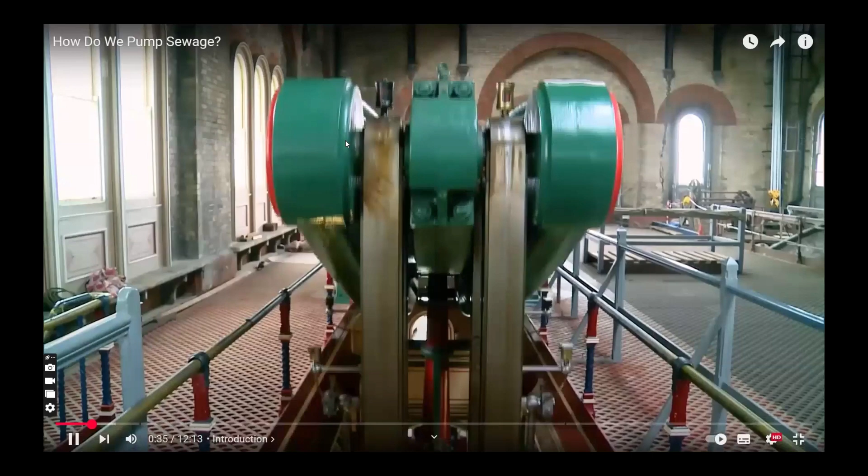Even though we have more sophisticated ways to treat wastewater before discharging it into streams and rivers, there's one thing that hasn't changed. We still use gravity as the primary way of getting waste to flow away from homes and businesses within the sewers below ground. And eventually we need a way to bring that sewage back up to the surface of the earth. But that's not as easy as it sounds.

I'm Grady, and this is Practical Engineering. In today's episode, we're talking about sewage lift stations.

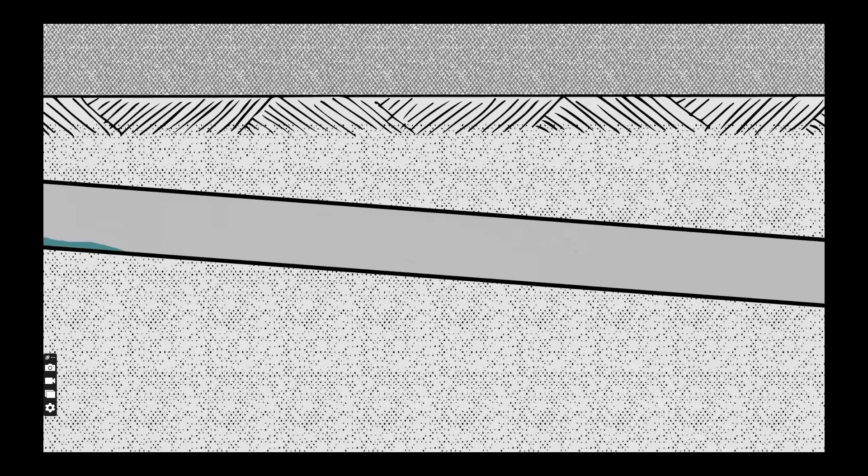I have a video all about the engineering of sewers, and today we're following that wastewater one more step on its smelly journey through a typical city. You can go check out that video after this if you want to learn more, but I'll summarize it quickly here. Most sewers flow by gravity from each home or business toward a wastewater treatment plant. They're installed as pipes, but sewers usually flow only partly full, like smelly water slides or underground creeks and rivers.

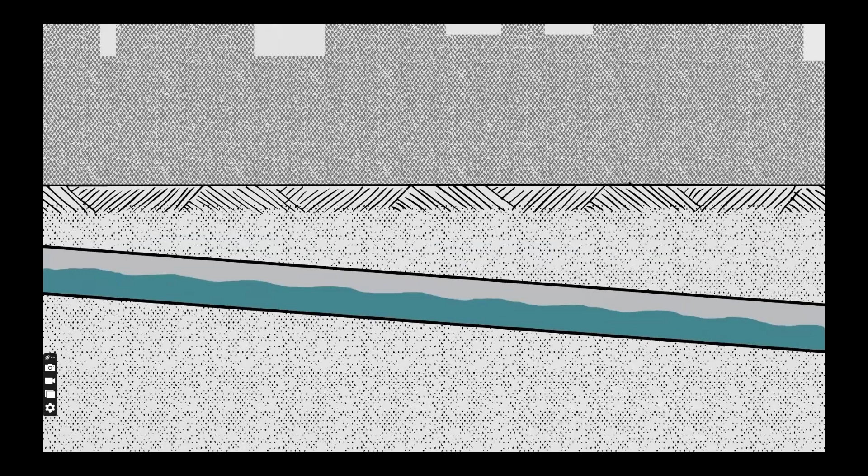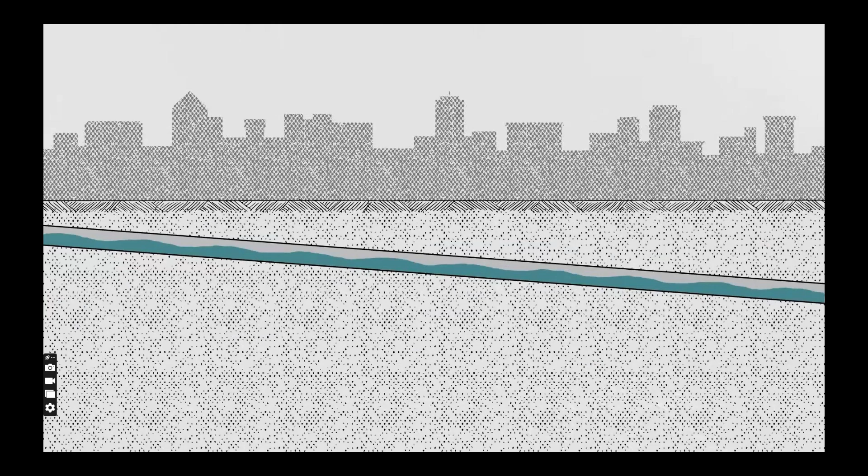This is convenient because we don't have to pay a monthly gravity bill, and it almost never gets knocked out during a thunderstorm. It's a free and consistent force that compels sewage downward, but because Earth's gravity only pulls in one direction, sewers must always slope, meaning they often end up well below the ground surface, especially toward their downstream ends. And that can be problematic.

Here's why. Sewers are almost always installed in open excavations, also known as trenches. This might seem obvious, but the deeper a trench must be dug, the more difficult, dangerous, disruptive, and ultimately expensive construction becomes. In some cases, it just stops being feasible to chase the slope of a sewer farther and farther below the ground surface. A good alternative is to install a pumping station that can lift raw sewage from its depths back closer to the surface.

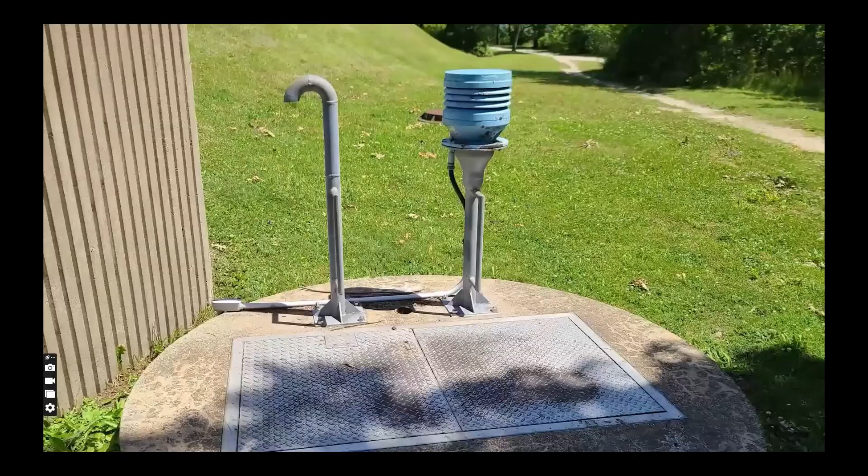Lift stations can be small installations designed to handle a few apartment complexes or massive capital projects that pump significant portions of a city's total wastewater flow.

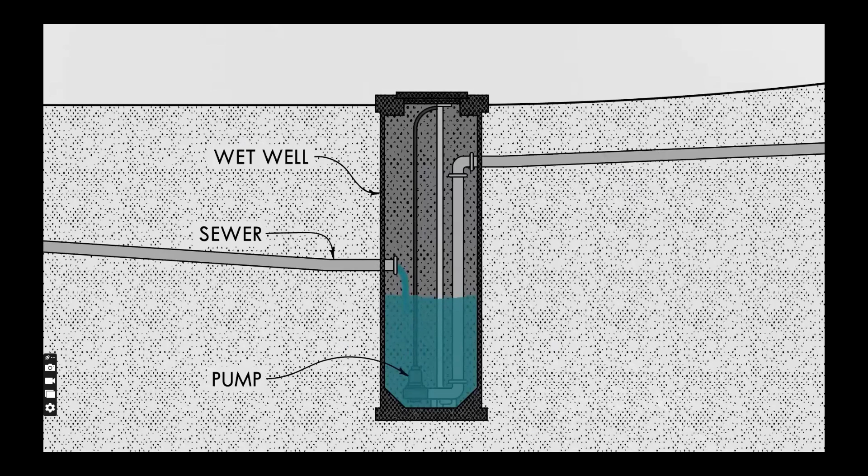A typical lift station consists of a concrete chamber called a wet well. Sewage flows into the wet well by gravity, filling it over time. Once the sewage reaches a prescribed depth, a pump turns on, pushing the wastewater into a specialized sewer pipe called a force main. You always want to keep the liquid moving swiftly in pipes to avoid the solids settling out, so this intermittent operation makes sure that there are no slow trickles during off-peak hours.

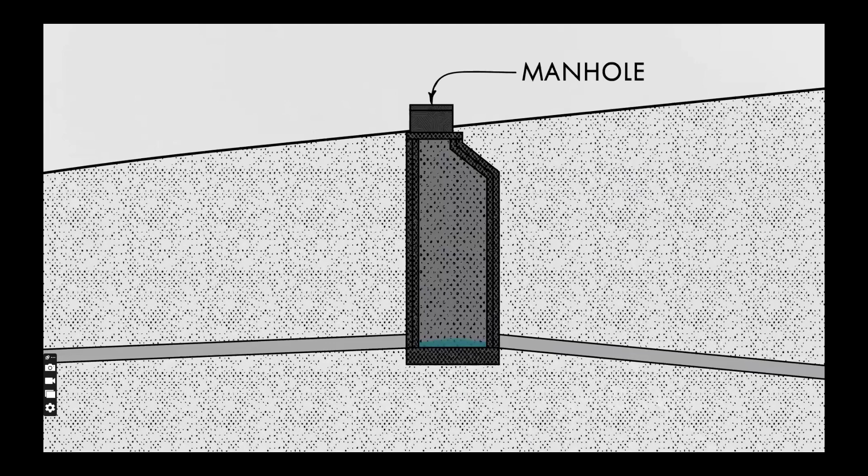The sewage travels under pressure within the force main to an uphill manhole where it can continue its journey downward via gravity once again. Another important location for lift stations is at the end of the line.

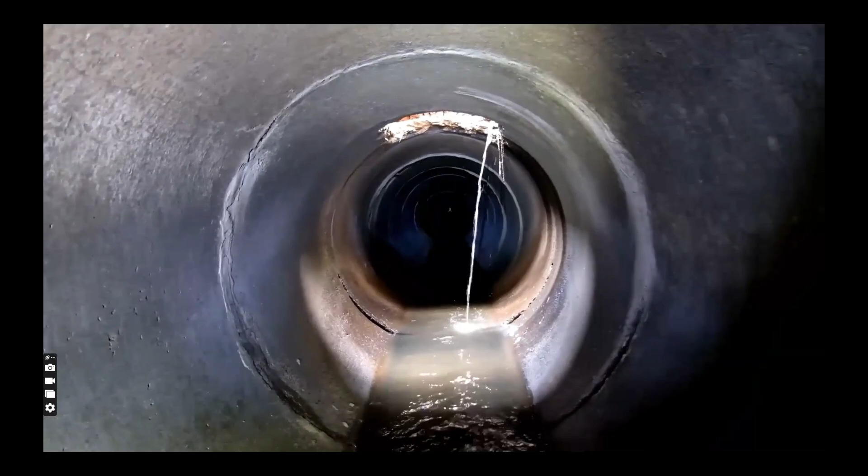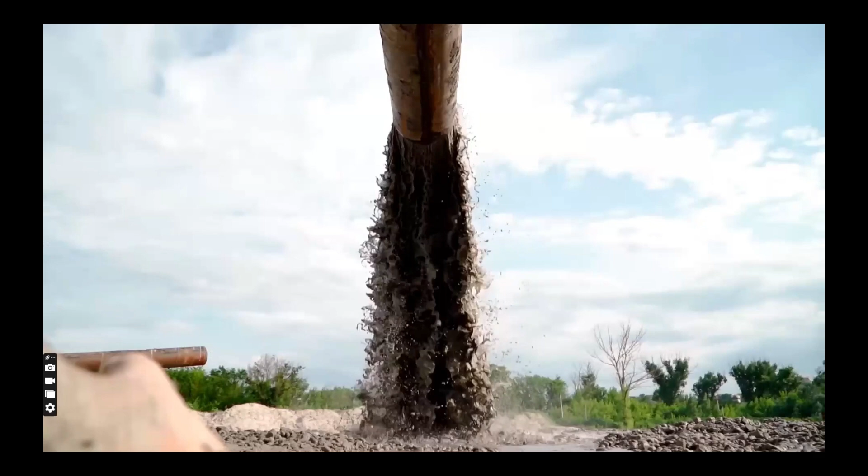Once wastewater reaches its final destination, there are no magical underground sewage outlets. Septic systems get rid of wastewater through leach fields that infiltrate the subsurface, but they're designed for individual buildings and aren't feasible on a city scale. That would require enormous areas of land to get so much liquid to soak into the soil, not to mention the potential for contamination of the groundwater.

Ignoring for now the fact that we need to clean it up first, we still need somewhere for our sewage to go. In most cases, that's a creek, river, or the ocean, meaning we need to lift the sewage up to the surface of the earth one last time.

Rather than build wastewater treatment plants in underground lairs like stinky superheroes, so we only pump clean water, it's much easier just to lift the raw sewage up to the surface to be treated and eventually discharged. That means we have to send some pretty gross stuff, sewage, through some pretty expensive and sophisticated pieces of machinery, the pumps, and that comes with some challenges.

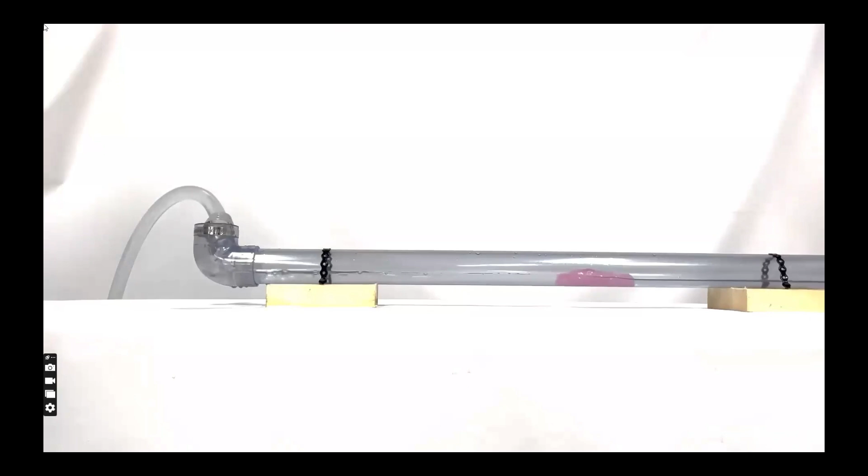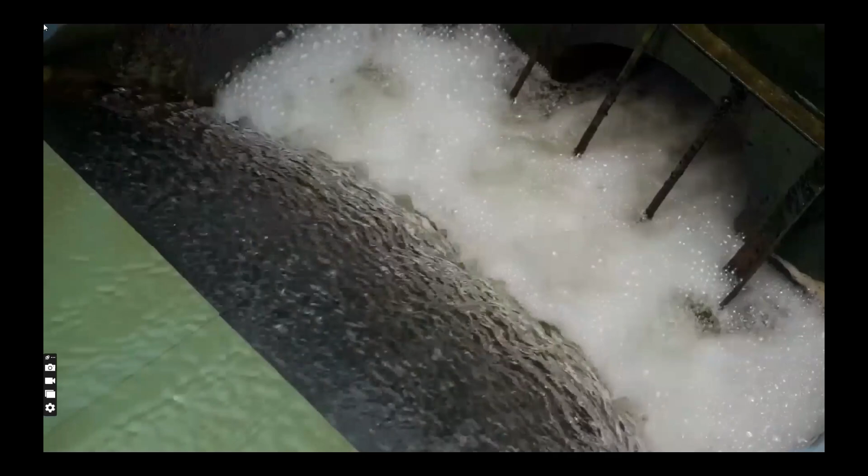We often think of sewage as its grossest constituents, human excrement. You know, poop. But sewage is a slurry of liquids and solids from a wide variety of sources. Lots of stuff ends up in our wastewater stream, including soil, soap, hair, food, wipes, grease, and trash.

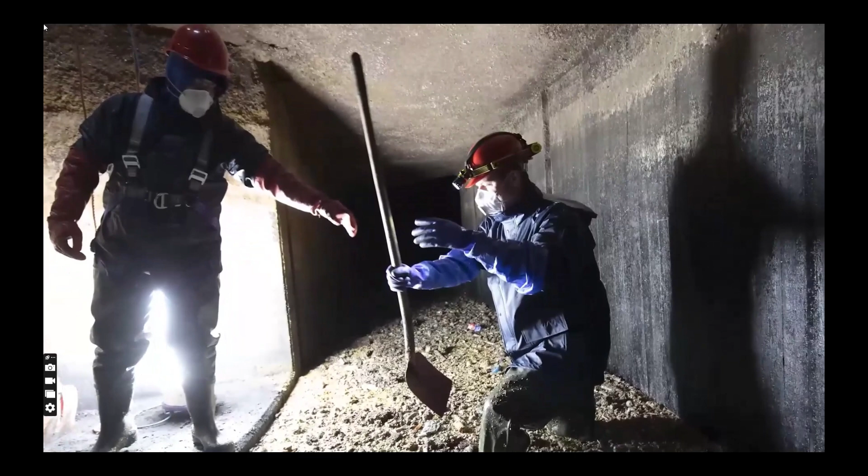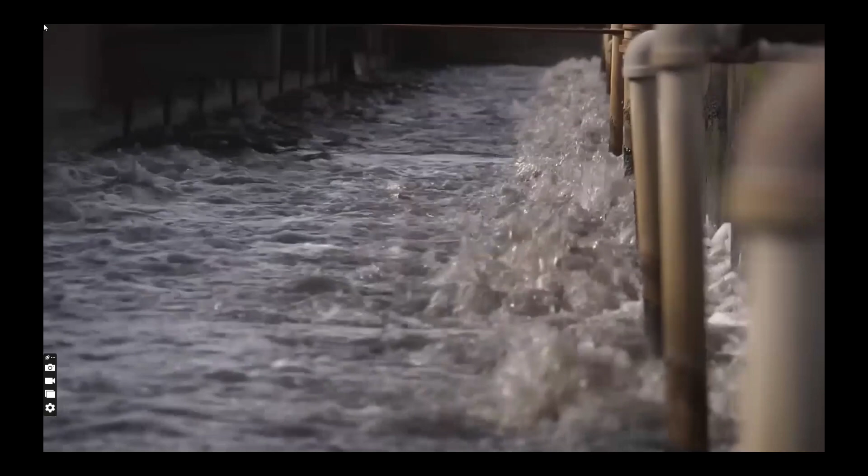These things may make it down the toilet or sink drain and through the plumbing in your house, but in the sewer system they can conglomerate into large balls of grease, rags, and other debris, sometimes called pigtails or fatbergs by wastewater professionals. In addition, with many cities putting efforts into conserving water, the concentration of solids in wastewater is trending upward. Conventional pumps handle liquids just fine, but adding solids in the stream increases the challenge of lifting raw sewage. Let me show you what I mean with this demonstration I set up in my garage.

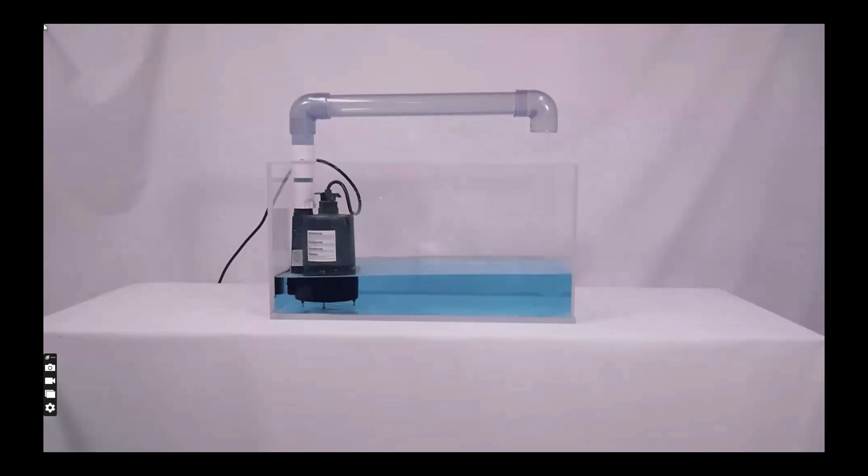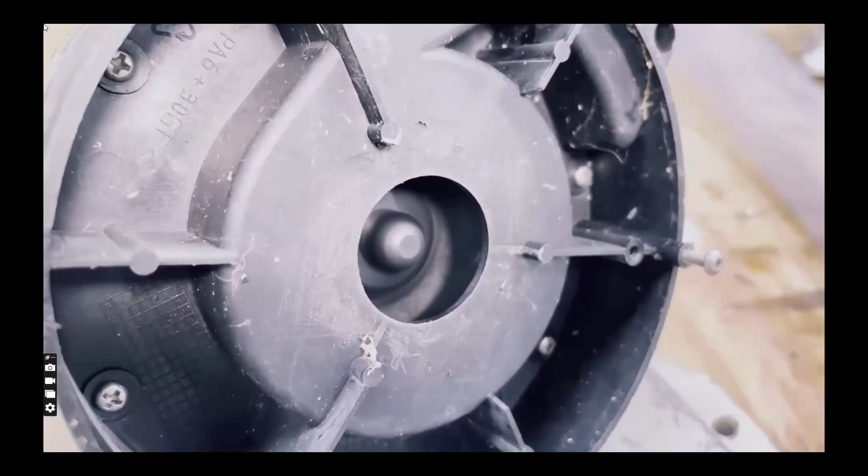This is a small submersible pump designed for moving water out of basements or pools. It's nothing fancy, just an electric motor with a small impeller inside a molded plastic case. I took off the screen so we can really see how much it can handle.

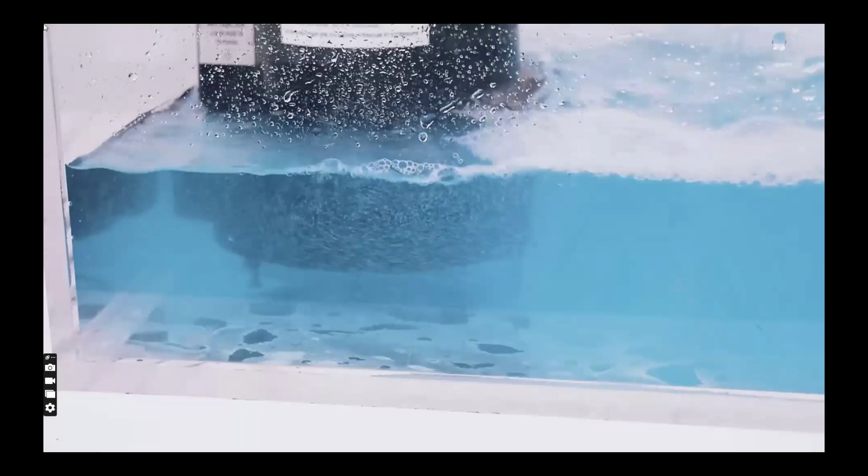The submersible pump moves clear water just fine. Toilet paper is no issue even for the small pump; it can break apart the paper with no problem. It can even manage small suspended solids like these plastic balls.

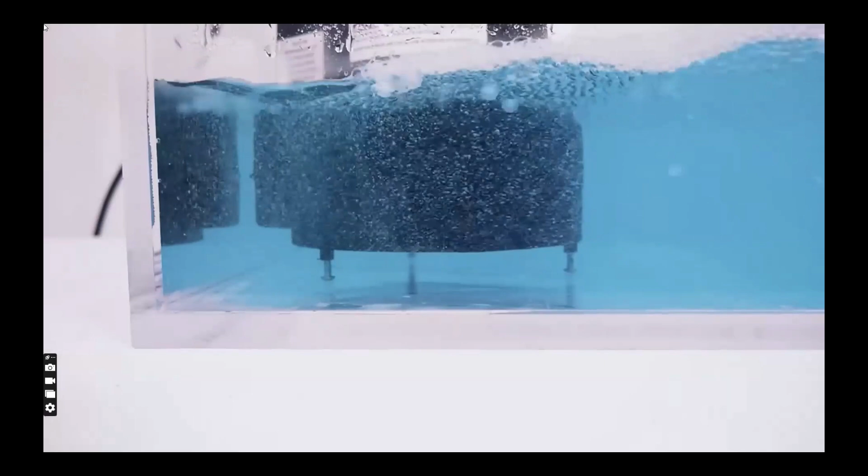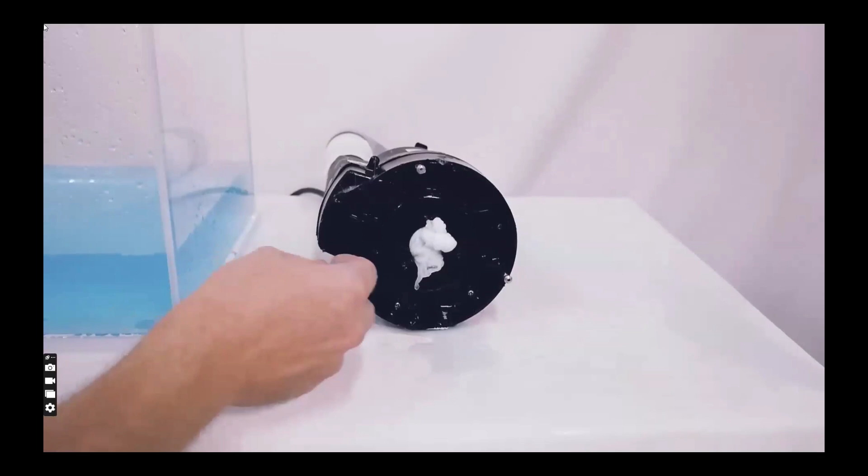The particles stay in solution, forming a slurry similar to raw sewage. However, larger solids in the stream can easily clog the pump. Anything bigger than the spaces in the impeller just won't make it through, and clogging really becomes a problem with stringy debris, like these quote-unquote flushable wipes. They may make it past a toilet, but you can easily see why these wipes are a problem in a wastewater stream. I don't feel like pouring a bunch of grease in my demonstration here, but you can imagine how congealed fats and oils would only exacerbate the clogging problem.

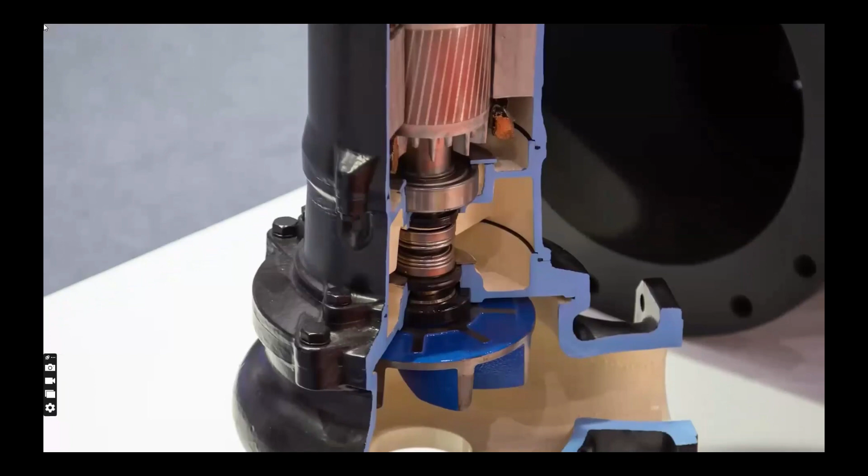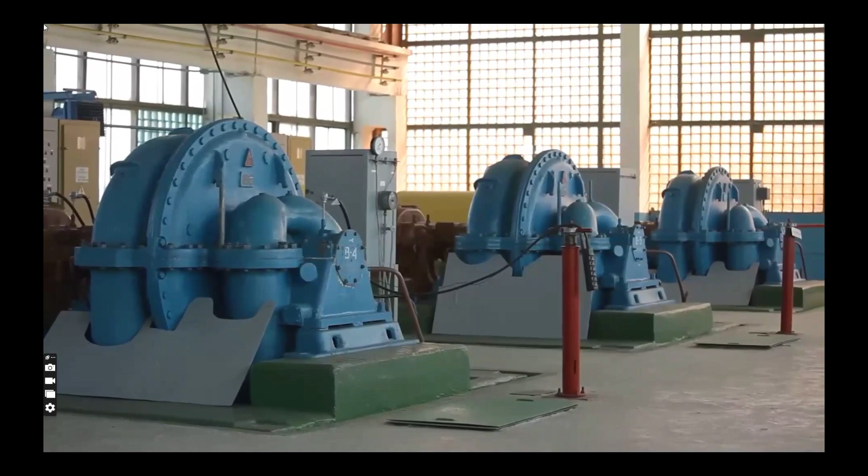It's clear that appropriately sized centrifugal pumps can handle certain types and sizes of suspended solids just fine. Sewage pumps are designed for the extra wear and tear: the impellers have fewer vanes to avoid snags, and the openings are larger so solids can freely move through them. Different manufacturers have proprietary designs to minimize obstructions as much as possible, but no sewage pump is clog-proof.

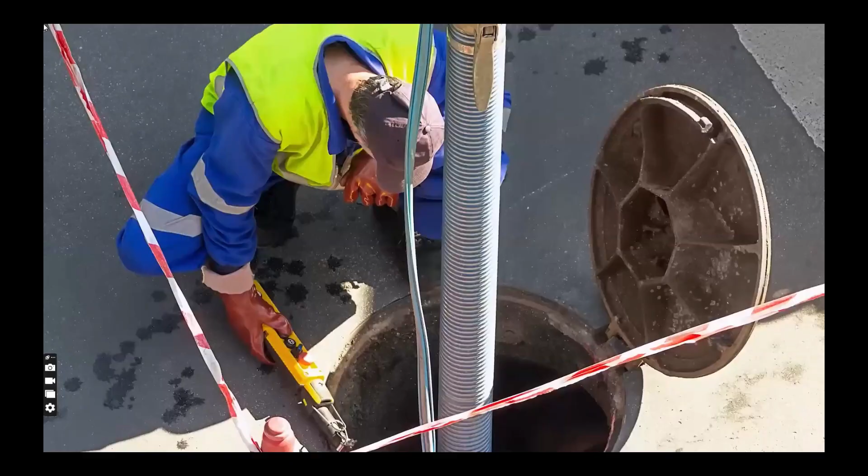Especially with today's concentrated wastewater full of wipes marketed as flushable, clogs in lift stations can be a daily occurrence. Removing a pump, clearing it of debris, and replacing it is a dirty and expensive job, especially if you have to do it frequently.

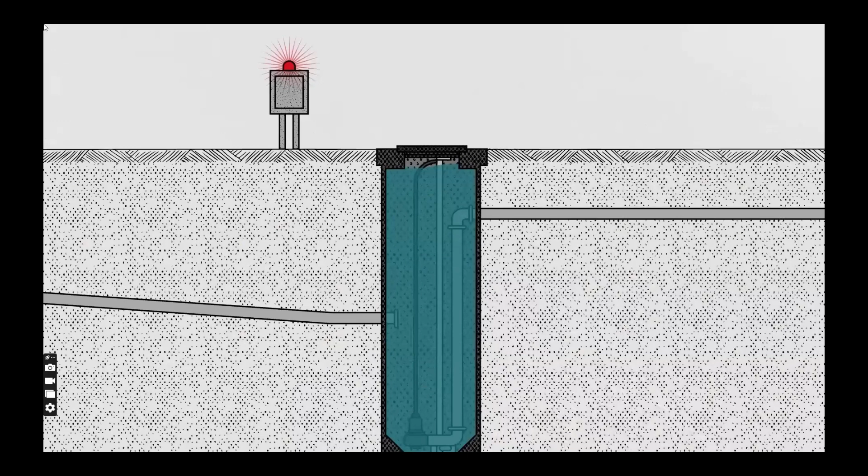Most lift stations have an alarm when the level gets too high, but if a clog doesn't get cleared fast enough, raw sewage can back up into houses and businesses or overflow the wet well, potentially exposing humans and wildlife to dangerous biohazards. A seemingly obvious solution to clogging is to use a screen in the lift station wet well to prevent trash from reaching the pumps.

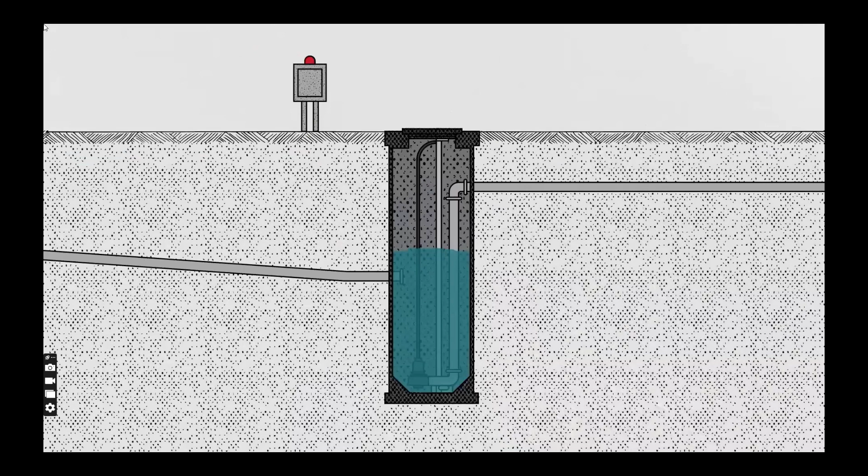But screens have a limitation: they can clog up too. By adding a screen, you've traded pump maintenance for another kind of maintenance: removing and hauling away debris.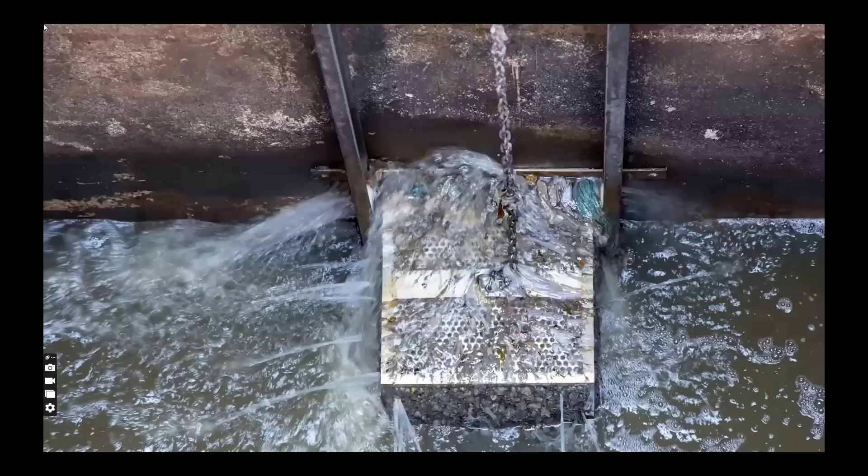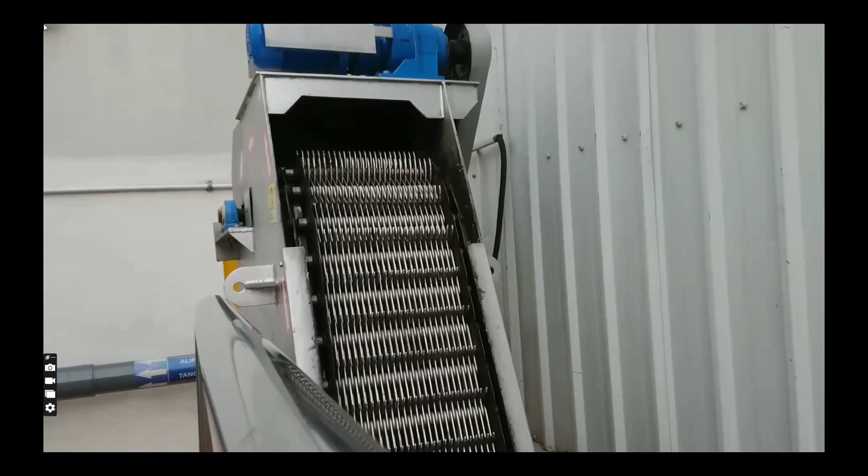Smaller lift stations with bar or basket screens can get away with maybe a once-a-week visit from a crew to clean them. Larger pump stations often feature automatic systems that can remove solids from the screen into a dumpster that can be hauled to a landfill every so often.

Sometimes using a screen is an effective way to protect against clogging, but it's not always convenient, especially since it creates a separate waste stream to manage. For example, if a lift station is remote where it's inconvenient to send crews for service and maintenance, you might prefer that all the solids remain in the wastewater stream.

After all, treatment plants are specifically designed to clean wastewater. They have better equipment and consistent staffing, so it often makes sense to focus the investment of time and effort at the plant rather than individual lift stations along the way. In these cases, there's another option for minimizing pump clogs: grinding the solids into smaller pieces.

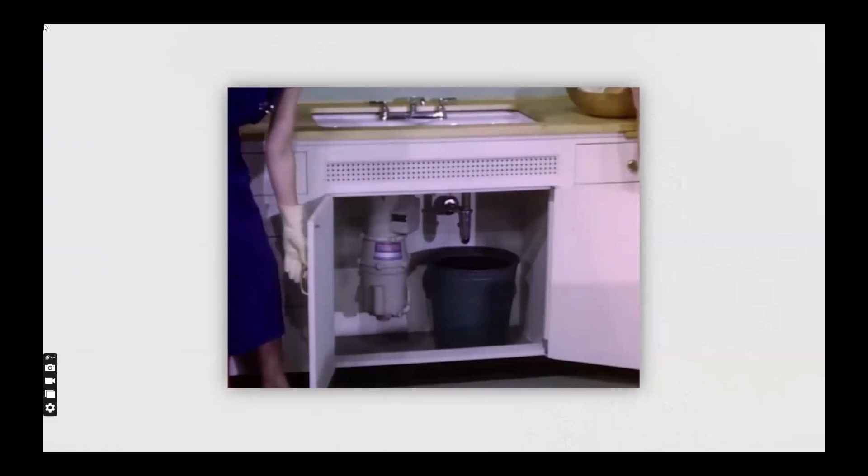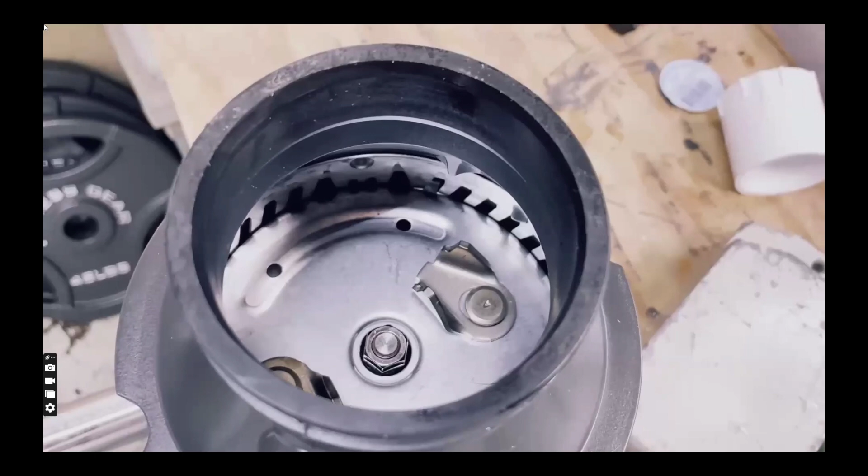There's a nice equivalent to a lift station grinder found under the sinks of many North American homes: the garbage disposal. This common household appliance saves you the trouble and smell of putting food scraps into the wastebasket. It works like a centrifugal pump with a spinning impeller, but it also features a grinding ring consisting of sharp blades and small openings.

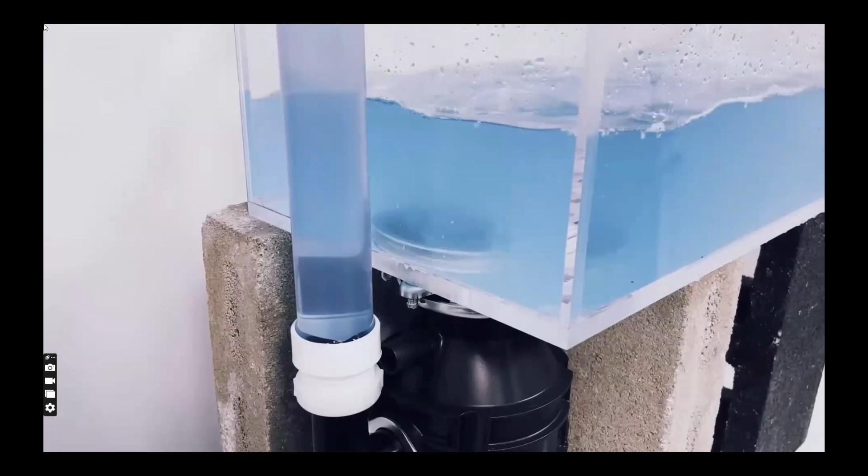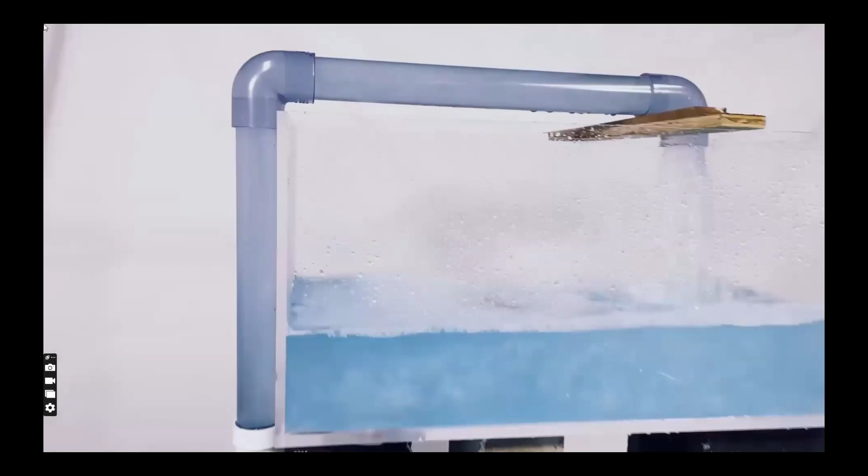As the impeller spins the solids, they scrape against the grinding ring, shearing into smaller pieces that can travel through the waste plumbing. My garbage disposal can handle all of the solids I tested with the submersible pump with no clogging issues. The wipes gave it a little trouble, but it was still able to chew them up.

Some lift stations feature grinding pumps remarkably similar to under-sink garbage disposals. Others use standalone grinders that simply chew up the solids before they reach the pumps. Grinders are often required at medical facilities and prisons, where fibrous solids are more likely to find their way into the wastewater stream. Large grinders are also used where storm drains and sewers are combined, since those systems see heavier debris loads from rainwater runoff.

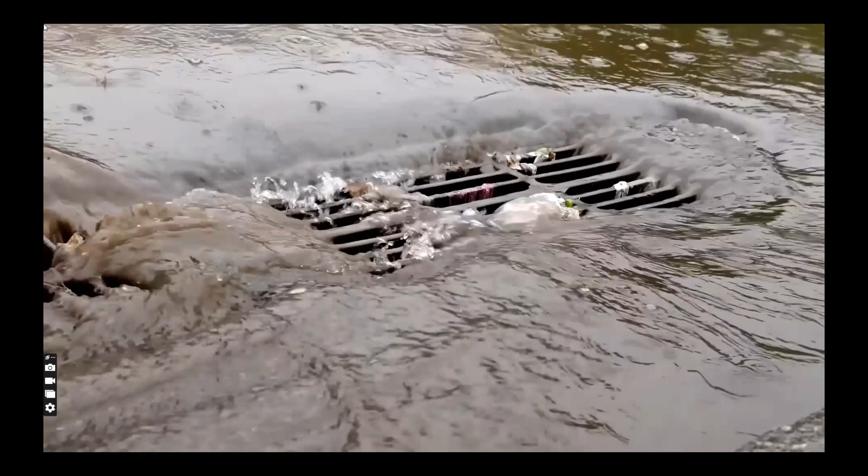A grinder is another expensive piece of equipment to purchase and maintain at a lift station, but it can offer better reliability, fewer clogs, and thus decreased maintenance costs.

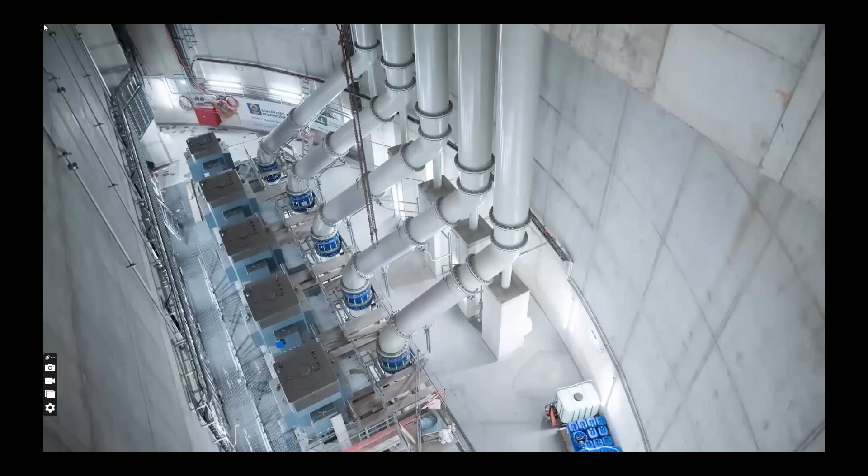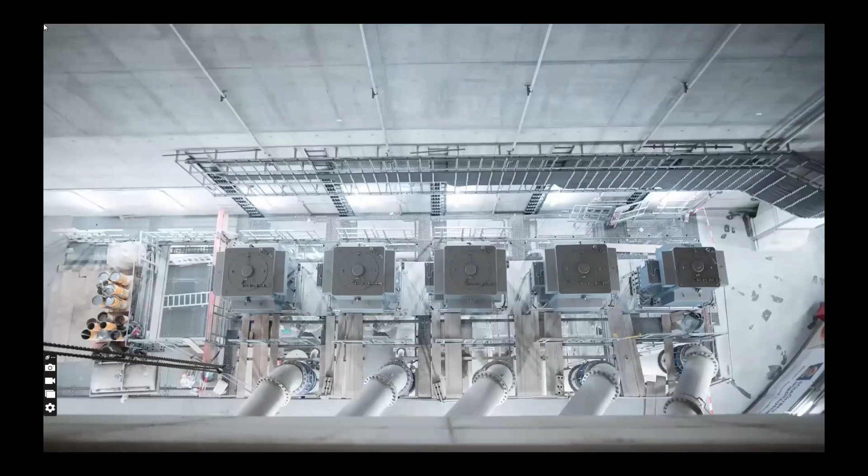Of course, clogging is not the only practical challenge of operating a sewage lift station. When you depend on electromechanical equipment to provide an essential service, you always have to plan for things to go wrong. Lift stations usually feature multiple pumps so they can continue operating if one fails. They often have backup generators so that sewage can continue to flow even if grid power is lost.

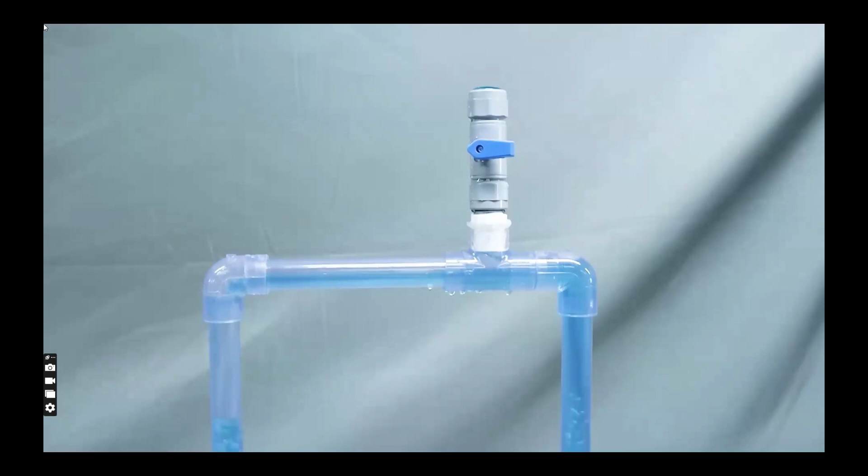Another issue with lift stations is air bubbles getting into force mains and constricting the flow. Automatic air release valves can purge force mains of these bubbles, but venting sewer gas into populated areas isn't usually a popular prospect. Although our urban lives depend on sewers to carry waste away before it can endanger public health, reminders that they exist are usually unwelcome.

Hopefully this video breaks that convention to help you understand a little about the challenges and solutions of managing wastewater to keep your city clean and safe.

It's time for everyone's favorite segment of me trying to cook while my wife tries to capture that on video. We're not expert chefs or foodies.

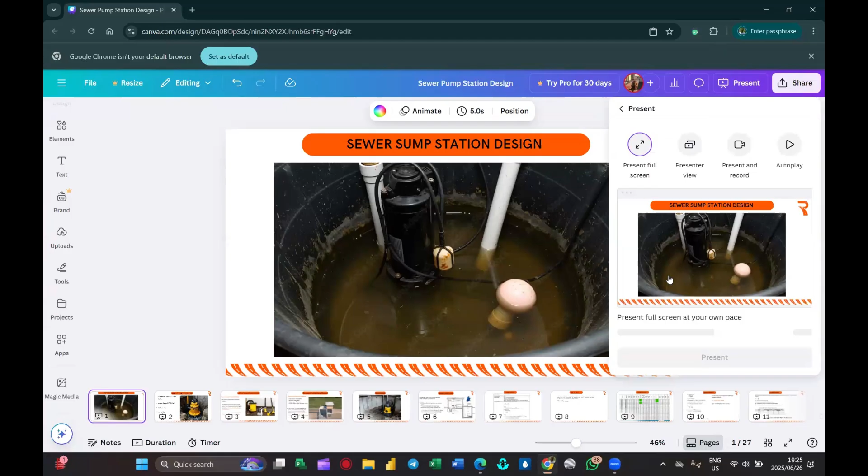Lance, Wesley, thank you. Jackson, it's good to see you. Thank you so much for joining us. I remember you, Trevor, thank you so much. Wesley dropped it too, but that's fine. Thank you so much, I get the message. So yeah, if you guys can see my screen, then that's good.

So today we're talking about sewer pump station design. As you can see, these are the topics to be covered. First of all, we're just going to talk about the purpose of the sewer pump station. Why do we need the pump station, and in what circumstances is it applicable? You need to understand under what circumstances you use a sewer pump station. You just don't use it because you want to use it, right?

The moment we introduce the word pump, just know that there's a lot of electricity involved, I'm sure you guys understand that. And the moment you introduce a pump, know that there's a lot of O&M that goes into that operation. O&M means operation and maintenance. So it's also something that you would be forced to think about. So yeah, the purpose of a sewer pump station.

Then we're also going to touch on the sump design, which is also known as a wet well, depending on which manual you read. But in most of the manuals that I've read, they just refer to it as a sump, but some say it's a wet well, so it's one of the two. Then we're also going to briefly talk about pump sizing.

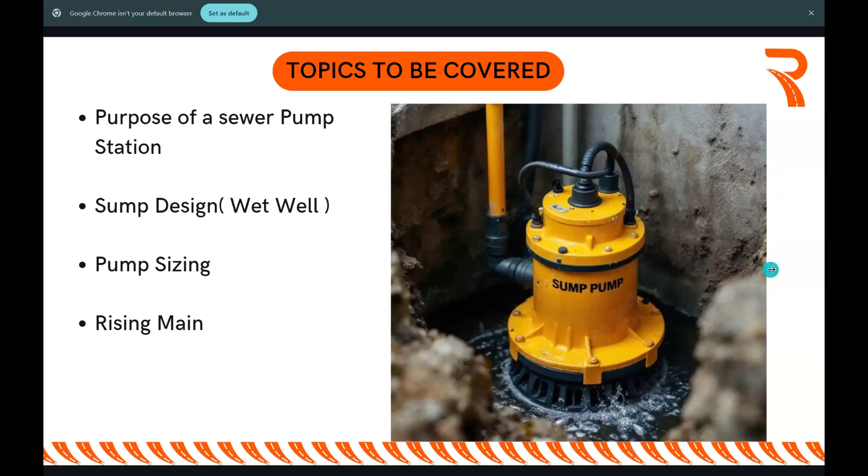Then we're also going to talk about the rising main. So we're starting on the sump, then we'll talk about the pump, then we'll talk about the rising main. I'll try and increase my speed because we have a lot of content to cover.

And I also want to leave some time so we can answer a few questions and discuss as we go. Why is sewer pump station... some of you who came early watched the video we're just reviewing, but why would you need a sewer pump station or a wet well? What's the purpose of it? First things first, you have to understand it is part of the wastewater collection system.

Its main purpose is to move wastewater from lower elevations to higher elevations when gravity flow alone is not sufficient. We need to emphasize this part. So remember, sewers utilize gravity to collect and transport wastewater.

I did mention that predominantly we'll be focusing on conventional gravity sewers. So as you know, you just have your pipes laid at a slope. We take advantage of gravity so that water flows and collects at one point, then is transported by a trunk sewer, probably to a wastewater treatment plant.

Now, what happens in an event where you cannot use gravity? That's the question we're talking about, because you're not always going to design your sewer system in a place where you have slope to your advantage. So let me just quickly sketch something here.

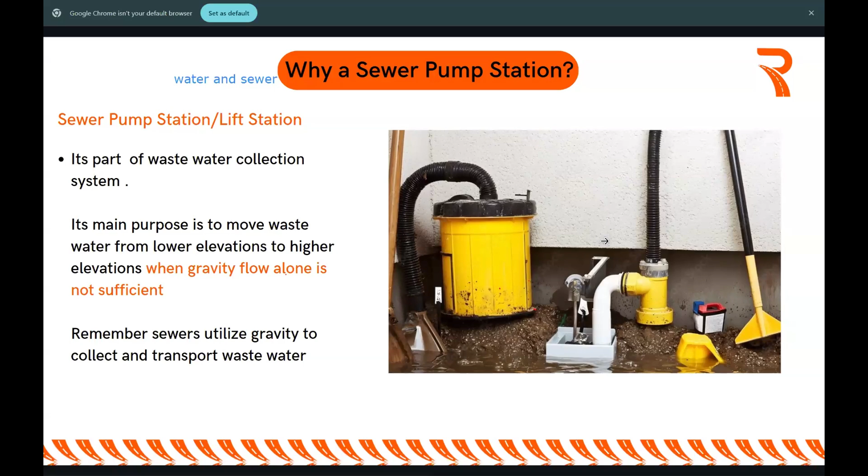As long as you can economically justify your solution, that should make sense. As an engineer, you have to know that it's not just about efficiency, but also the economics of whatever you're designing. It has to make sense. It's pointless to design infrastructure that cannot be implemented because it's extremely expensive. So I wanted to put that out there. Yes, we're talking about it today, but this should be our last resort.

Okay, so those are the two options that you should consider before having a sump station.

Somebody's writing on my screen. I don't know who that is. Please stop.

Great. So we already spoke about this. Sewer pump stations, or lift stations as they're also called. The first thing is to overcome topography, serve low-lying areas, reduce deep excavation, and transfer wastewater between zones.

This is what I was saying. Look at this picture - this is more of a flat terrain. You can see that this sewer is coming from this direction at a certain slope, then it collects in a sump. In the sump, these are called submersible pumps - we'll talk about that as we start discussing pumps. The sewer collects in this sump, then after 10 to 15 minutes, depending on the cycling time we've designed for that sump, our pumps turn on and pump that sewer up.

So these are the four circumstances why we use a lift station: to overcome topography, to serve low-lying areas in flat terrains, to reduce deep excavation, and to transfer wastewater between zones. Case in point: in coastal areas with flat terrain, wastewater from homes and businesses cannot flow easily to the treatment plant. Instead of installing deep and expensive gravity sewers, engineers shall install a sewage pump to lift the sewage to a higher level.

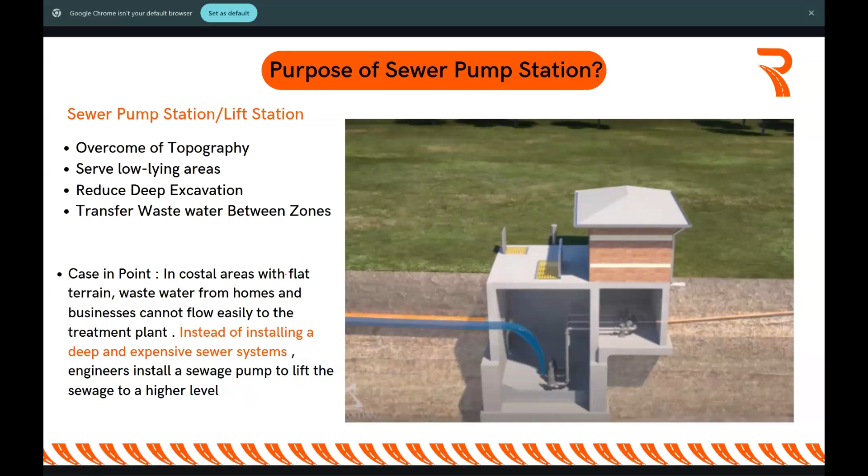So there are some instances where we cannot utilize gravity alone. In those instances, we would have to ensure that we've got a lift station.

Okay, so this is a typical lift station. As you can see, this is a submersible pump - this is the best picture that I could find. I don't know if anyone has ever seen one, but I've seen quite a number. It's not a very good sight, especially one that has been working and is being maintained, but it looks something like this. I'm going to show you a couple of pictures that we're going to be looking at.

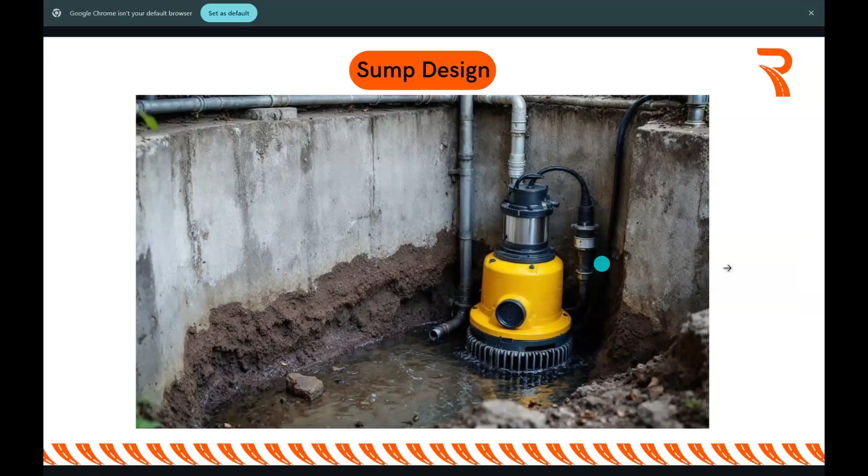This one utilizes what we call a self-priming pump. So the first thing you need to understand if you're designing a wet well is its storage capacity. What should it do? It should provide sufficient storage for pump operation cycles. So the first thing is it has to be able to contain the sewage that it's expecting. What do we mean by that? You have to know how much sewage you're going to be collecting and how much sewage you're going to be expecting.

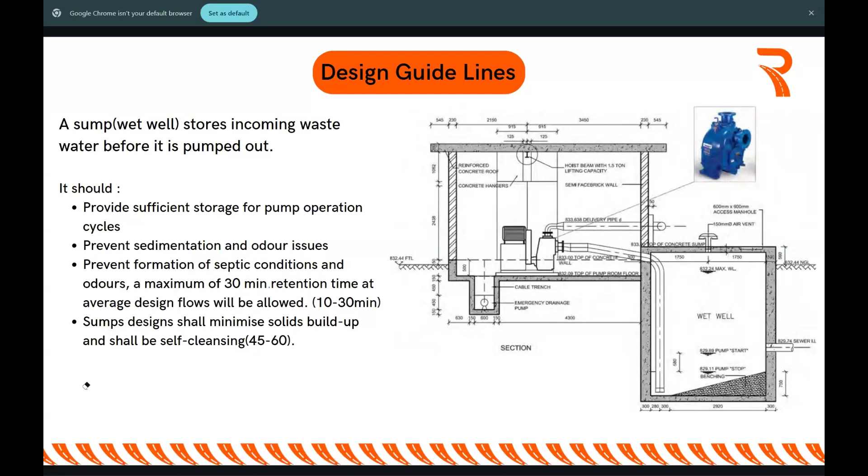So I usually like to go for the maximum retention time. I've got my own reasons as well, but I usually like to go for the maximum retention time. You can always play around with these figures and see which design retention time works ideal for you. So that's that, we've covered that part. That's quite important. So I've got a design criteria that I've used.

This is a snippet from a design that I was working on. So I usually just have a design criteria. What is the design horizon? Is it full development? We were designing for 2,411 stands, so we're collecting sewer from 2,411 stands.

That's good. So what are our design flows? We know that our ADF will be A multiplied by 0.85, which is our return flow. So what is A? A is actually the average daily flow. Then we have our peak dry weather flow. We use a peak factor of 2.0. In some manuals, some people use 2.5. I use a more conservative peak factor, 2.0.

Then we have to also allow for stormwater ingress, which is your peak wet weather flow. It's 15%. Now, there are some designs that are quite extreme that go up to 30% stormwater infiltration. So these are things you also have to think about. Just don't place figures haphazardly. You need to know why you're using the factors you're using. We usually talk about this in detail when we do gravity designs.

Then after that, we come to a waterborne sanitation design. This is the formula for calculating the sump size. Remember, we said we want to design a sump. So what do we design? We want to design something, give it shape and size. So we have to size this thing. You just don't approximate and say, okay, I'm servicing 2,000 houses, so my sump will be 3 meters deep.

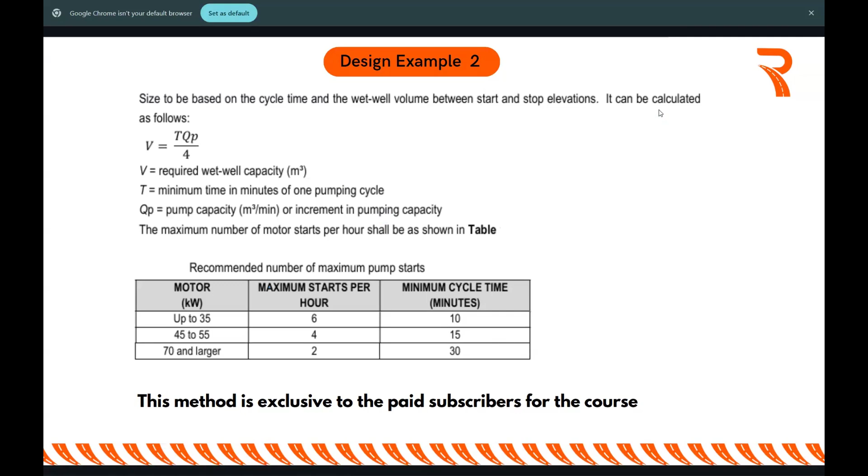Thank you, thank you. We have Isaac - clarify on the manual and the name of the equation for example one. All right, so the manual I've used is called the design guidelines neighborhood manual, section K, which deals with sanitation.

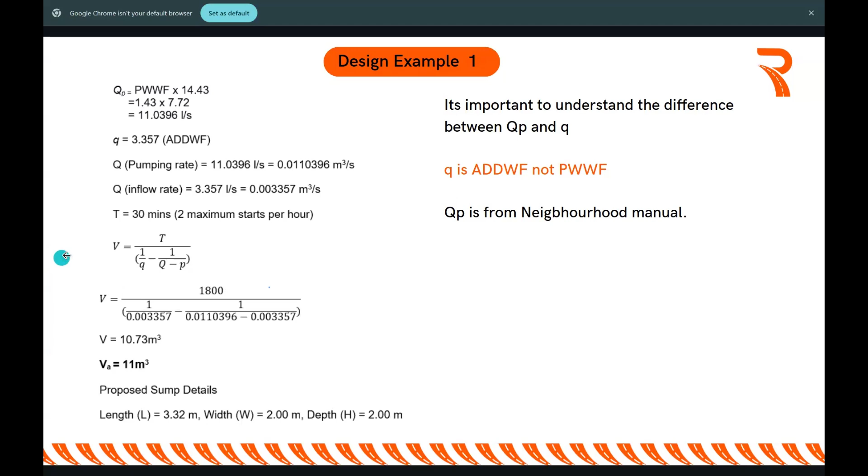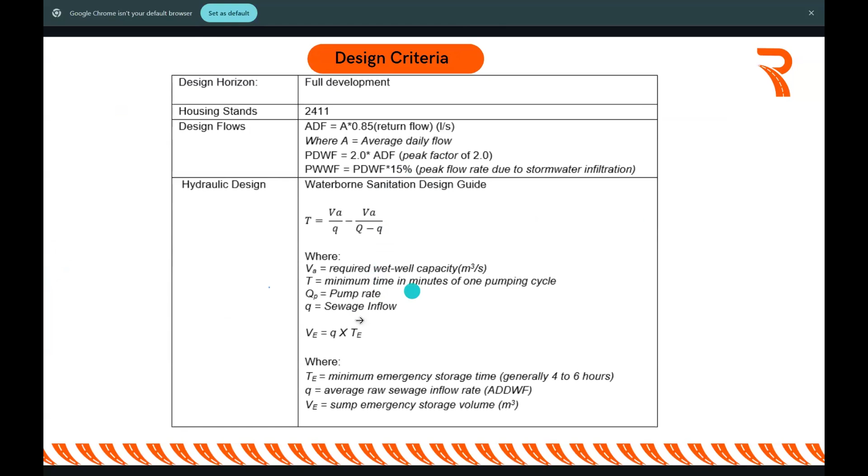So if you just go to that manual, this particular equation is there. They do not, however, have an example in that particular manual. So the example is something I did on the side by myself. But should you go to that manual, you can find it. Should you need that manual, please reach out to me after the webinar, and I'll be able to provide it for you.

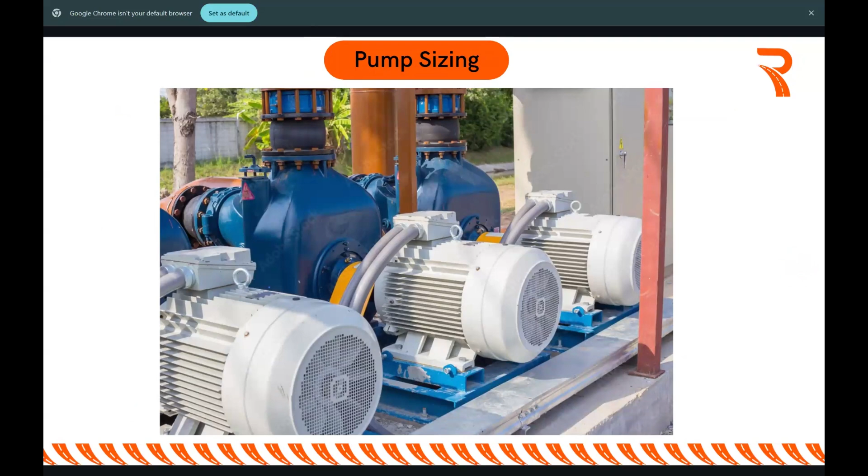So yeah, guys, let's quickly move on to the second section, which is your pump station. Let's talk about pump sizing. So we spoke about the collecting basin, which is your sump. We've sized our wet well. Now we want to talk about the pump. How do we move that wastewater from where it's being collected, the wet well, to the intended destination? So we have to talk about the pump design.

So the first one uses what we call a self-priming pump. This is when the pump is outside the wet well, as you can see, something like this. You're having a separate pump house there, and it's actually operating. In this particular one, you're having a suction head lift. You're going to see probably the example of sizing our pump using this one - we're not going to use the submersible pumps. So this is the first option.

Then you can have the second option, which is the submersible pumps. Now, from my experience working with a number of local municipalities, they do not like the submersible pump format. It's mostly shunned by a lot of municipalities, but you should just put it there, or maybe suggest it to the client. But most of them just say no, we don't want this one, we want this one. So I've seen this one popularly used, and this one also is something I like to use here and there, but most popularly used is this one. So we're probably going to be using this one for our example today.

So the difference, as you can see, your pump is outside. For the submersible, your pump is immersed into your wastewater. So you have the pump inside the sump. It's a submersible pump, right? You have your pump inside. So this is the pump in this particular case.

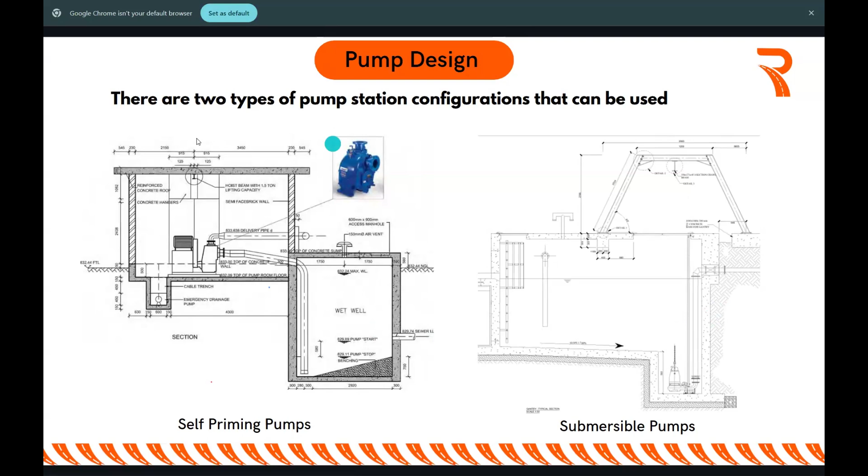So the first thing that you have to do when you're sizing a pump is two things, two things that you need to know. Let me just quickly write them down. You need your Q, which is the required flow, against your head, right. Which is actually, if we are being specific, called your TDH, your total dynamic head. So you need to first get your flow and get your total dynamic head. Those are the two parameters that you need to be able to size your pump.

So we are going to briefly talk about sizing your pump in this section. Fortunately or unfortunately, I'm just going to be using figures that were calculated before. So the pumping configuration should be determined based on the analysis of pump flow versus the system curves, right? We're also going to briefly touch on that. So various combinations can be used, such as multiple pumps, combinations of small and large pump units, or variable speed pumps, or a combination of constant and variable speed pumps.

So the first thing to determine is your Q, and then the required discharge in cubic meters. So what is our Q? We already got our Q, right? Remember when we're sizing our wet well, our Q is that QP that we have. So it's either your peak wet weather flow, or your peak wet weather flow multiplied by the factor of 1.43, depending on what formula you're using. So we've already established where and how you get your Q, which is your cubic meters per hour. So this is the flow that has to be pumped by that pump for this whole system to work accordingly.

Now, one thing you also have to notice is for your suction header pipe - let me see if I can find it. Yes, we're dealing with this one, let me try and explain. This is the suction pipe that we're talking about, this pipe here.

So first of all, we've got the head loss here. We are sucking water from probably a distance, we're giving it a hypothetical value of 2, so already we have 2 meters that we need to add there.

Then we're having the discharge - what is the head loss here? Let's say our treatment plant is at an elevation of 37, and our pump station is at an elevation of 20 above sea level. So our static head is like 17, that's the figure.

Then after we do that, we also have to calculate the frictional losses, because as this water is being sucked into the pipe, it's experiencing friction against the pipe walls. This is where we also get to use the Hazen-Williams, so the D now is the diameter of this pipe. Take note, because the diameter of the suction header pipe is usually different from the diameter of the discharge pipe.

The diameter of the suction header pipe can be 100 millimeters. We're still fine with this one, at least 100 millimeters. I usually use 100 millimeters, which should be fine.

But for the discharge header pipe, we use a minimum of 160 millimeters diameter, especially if we're dealing with sewers. If we're dealing with sewers, you do not have a discharge pipe less than 160 millimeters. Please take note of that. Anything smaller than 160 millimeters will give us problems.

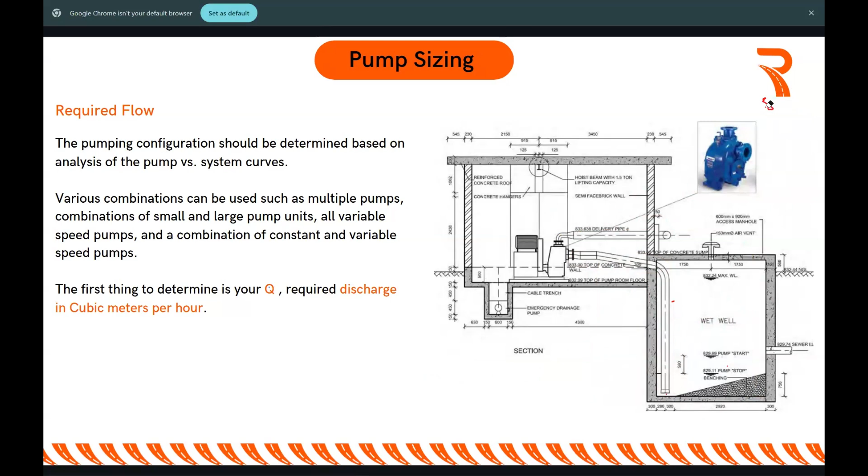Now, we are dealing with sewer again. If we're dealing with water, the specific gravity of water is 1. But if we're dealing with sewer, this is now classified as a slurry, which means your SG cannot be 1. So probably you're using your SG of 1.2, 1.3, 1.4. In a worst case scenario, you can use 1.5, but that's stretching it. So anything from 1.2 to 1.4 can work for your SG.

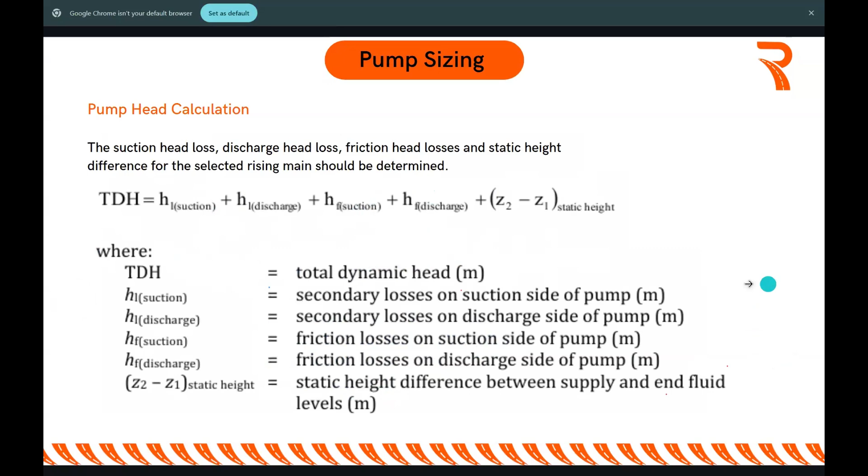So you just calculate your frictional losses, then multiply by the length of the pipe so you can get the head losses due to friction for that pipe. Use that formula, you get it, you plug and play, you get your total dynamic head. So you need your total dynamic head. If you don't use your total dynamic head and only use your static head, there's a chance you might undersize your pump because you're using an incorrect TDH against maybe a correct Q.

So remember, I said there are two components you need to size your pump: you need your Q against your H, which is your TDH. This will be in cubic meters per hour, that's your discharge, Q is in cubic meters per hour. Then your H is in meters. Those are the two components. So H, we're just calculating now, that's your TDH. You do that and plug it into that formula, then you calculate your TDH.

Now, using those two values, you have to obtain what we call pump curves. This is where you have to obtain pump curves or a pump manual. So how do you obtain a pump manual? You obtain a pump manual from your supplier, from your local manufacturer.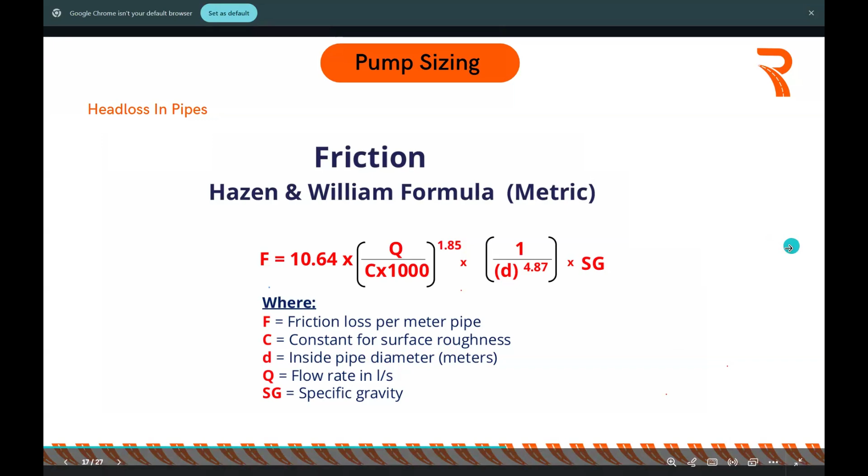So here in South Africa, we've got a number of manufacturers we have worked with. This does not apply to every other country. So let's say you're in Kenya and you want to design a pump station, you have your Q and you have your TDH. What you have to do is find local pump suppliers within your country, then call them and ask them for a pump manual. They give it to you for free, you don't have to pay for this.

It's different from manufacturer to manufacturer. Some manufacturers have pumps written as 4HH5P, some have 2HPS - these are what we call their system curves.

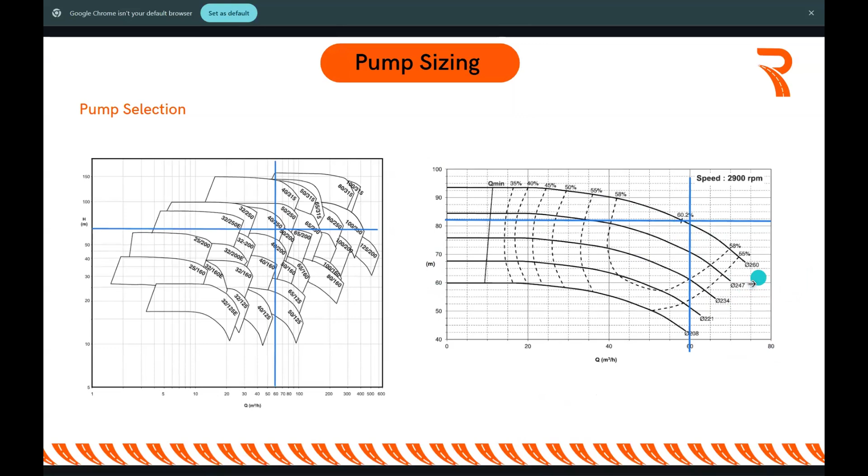Okay, so that's the size of an impeller there. Then we're having the efficiency of that pump. As you can see, that pump is slightly just below 60%, and the size of an impeller is probably slightly above 260 millimeters. So as you can see, you're still having your M, this side, which is your TDH in meters, and they're having your Q. So you now have the size of an impeller, and you now have the model.

Now what we need is to size the pump motor. So that was the pump. You have to understand that the pump and the motor are two different things. We've got the pump house, which has got an impeller and a volute, which is just the pump casing. Then you've got the motor, which actually runs the drive shaft. So you've got the motor, the one that collects electricity.

So we need to also size the motor, how big it's going to be. As you can see with this pump manual, you're having your motor lines, the lines going this way. These are your impeller sizes. So you just pick the impeller size that we have.

We said our impeller size is at least 260, so we can go for 260 there. What you do is come here, you're having your flow, you draw your straight line for the flow. We said our flow is 60 cubic meters. Then where that line cuts the line of the impeller, you draw a horizontal line, and that gives you the size of your motor. As you can see, that's 2, 4, 6, 8, 10. So the size of this motor that we might need for this pumping station to pump a flow of 60 cubic meters per hour over a TDH of 82 meters, we might need a motor of 22 kilowatts.

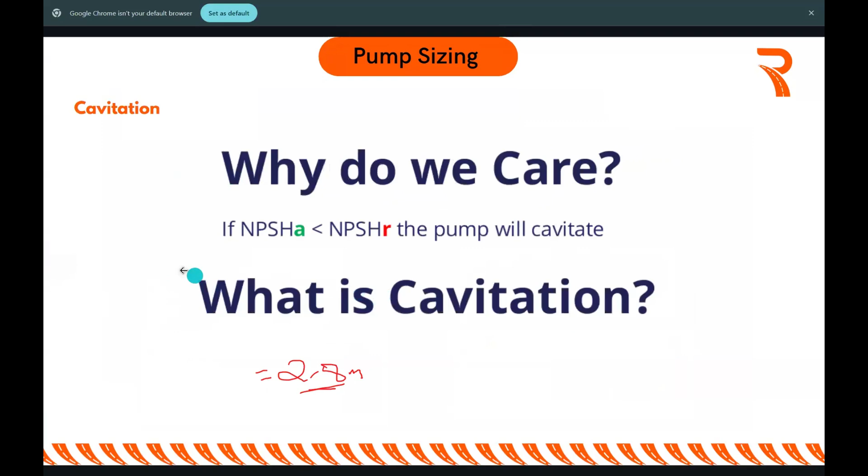So this is important. After you calculate your NPSH available, let's say it comes out to 2.8 — this is just an example number. So if your net positive suction head available in your system is 2.8, but according to our pump manuals and the TDH, H, and Q that we selected, the net positive suction head required by this pump is 3.8, then what this means is the NPSH required is greater than the NPSH available, which means your pump will cavitate.

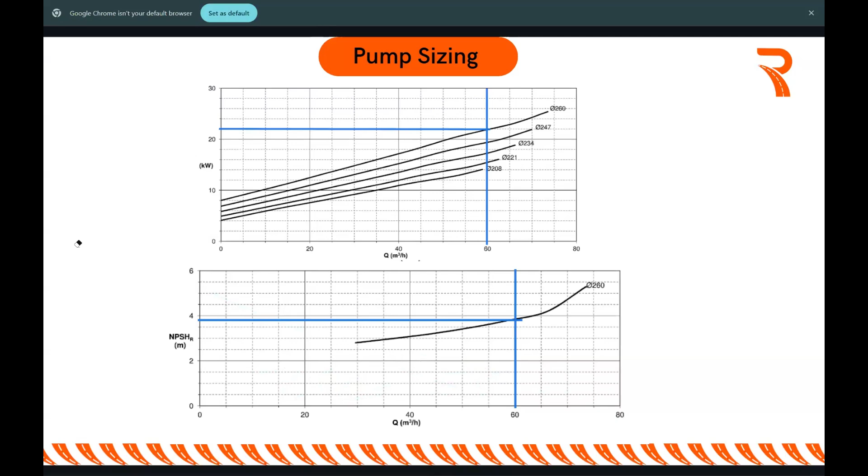It'll cause cavitation. Unfortunately, I don't have pictures to show you what a pump in cavitation looks like. Cavitation is a simple phenomenon where vapor bubbles form on the eye of the impeller, then they implode, causing damage to the impeller. Over time, because of these bursting vapor bubbles, the impeller gets damaged, so your pump becomes less and less efficient. Instead of pumping 60 cubic meters per hour, you'd realize that in 2-3 months it's not even pumping 50 or 60 cubic meters per hour.

It has dropped down to like 30 cubic meters per hour because your impeller is being damaged by this concept of cavitation. Now, if there's one thing that you're going to take seriously, please take this very seriously.

It's very important, particularly when you're dealing with self-priming pumps. So just a recap: remember, you have to calculate your LS. It will be here, right? Then you would have to calculate the rest. So LS will be probably here, from the center line of your pump. Let's say your liquid will probably be at that level.

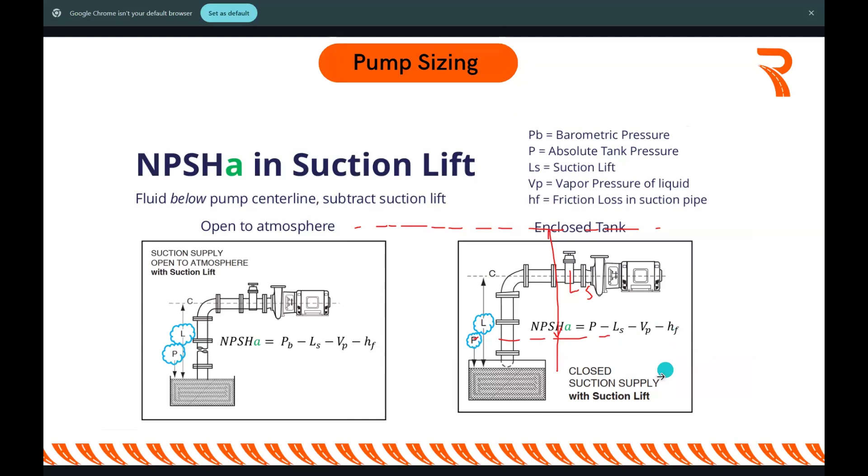So from the center line of your pump, that will be your LS, right? Remember, this is a closed system, so if you're using the formula for a closed suction supply lift, you're having your P, which is your absolute tank pressure, minus your LS, minus your vapor pressure, and minus your HF.

I wish I could explain the full concept of cavitation to you guys, but I can't. Just know that if somebody asks, what is cavitation? Just say this is a scenario where the net positive suction head available is less than the net positive suction head that is required for that pump to function.

Then your pump will be in cavitation and it will definitely be damaged. So in that equation for net positive suction head available, you've got the HF, and your HF is also related to the diameter of the pipe. So should you increase the diameter of the pipe, you decrease HF, and should you reduce the diameter of the pipe, you increase HF.

I'm telling you this relationship so that you can know what to adjust should you have a net positive suction head available that is less than the net positive suction head that is required. In that scenario, you have to lessen the depth of your sump, so that it doesn't have to suck deeper, so that you don't have cavitation.

So cavitation is a big problem in pumps. I'm telling you, this cavitation is a silent killer of pumps. It's a serious issue. Whenever you're having self-priming pumps, you need to take this issue of calculating cavitation very seriously. Failure to do so - remember, this is actually a sewer pump station.

If it's potable water, we understand - if a pump fails, we can afford to go for 24 to 48 hours while we're trying to fix it. But for a sewer pump station, every hour is valuable, so the pump station has to be mechanically robust. You can't design something that fails after 3 months. And I'm telling you this now from experience.

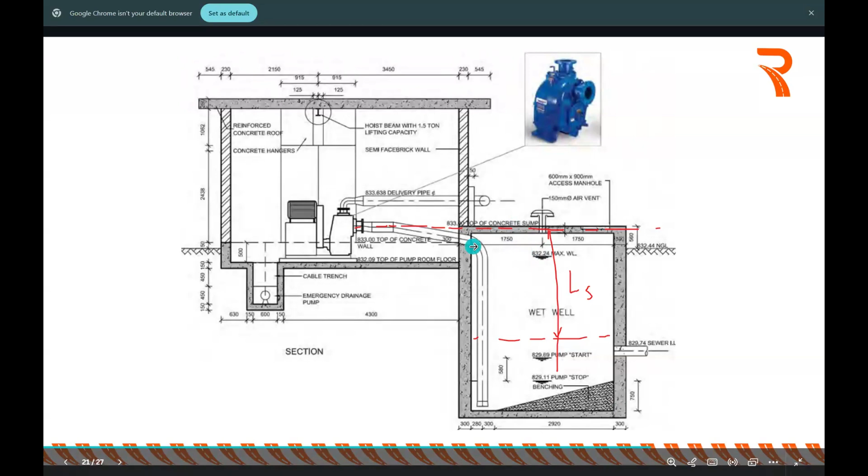It's because of the improper sizing of your pumps, which then causes them to cavitate. And one of the silent killers is you ignoring things like this calculation that we just did now. So take note of that. I had to really explain that. So if there's anything you can take from the webinar, just know that whenever you're dealing with self-priming pumps, the number one thing you need to watch out for is your cavitation.

Okay, so I think that's that. Now, from the pump station, I think that's it. So what you then do is you have the size of your motor, you have the size of your impeller, and then you find out with the size of your motor and the size of your impeller, what is the net positive suction head. If you see that your pump is not cavitating, then you're good.

So you then talk to your supplier and say, okay, listen, I want this pump with this impeller and this motor. Then they will probably supply the proper pump with the proper volute and everything. So all you need is those two parameters to size your impeller and motor and check your net positive suction head that is required. Then everything else your manufacturer should be able to supply for you.

So this is not something that is done by the mechanical guys, because the mechanical guys won't have the due diligence to calculate and investigate the net positive suction head phenomenon. They won't do that. They will just say, okay, what's our Q? What's our H? Okay cool, this is the pump, use this one.

If you don't check the net positive suction head required by the pump you selected versus what you have on the ground, and compare the two, you have a problem. If it's not cavitating, you're good. But if it is cavitating and you don't investigate, then be guaranteed that your pump station or pump will fail due to cavitation. So that's very important.

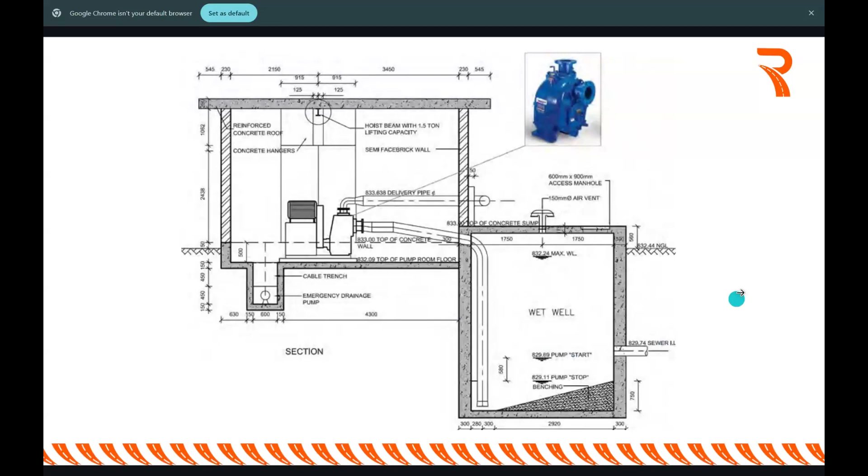Let me move quickly, I'm running out of time. Then we have the pipeline design, usually the last bit of the pump station. This is just an example of a pipeline design, done in IDAS. I'm not sure if you guys know the software called IDAS.

It should give you a data print set like this, showing distance, ground level, invert level, and depth. For this pipeline, the minimum depth should be about 0.6 meters in less trafficked areas. In trafficked areas, we're talking a minimum of 0.9 to 1 meter below ground, so only in trafficked areas should you have that depth. Then you have your grade, your static head, dynamic head, flow, and other things.

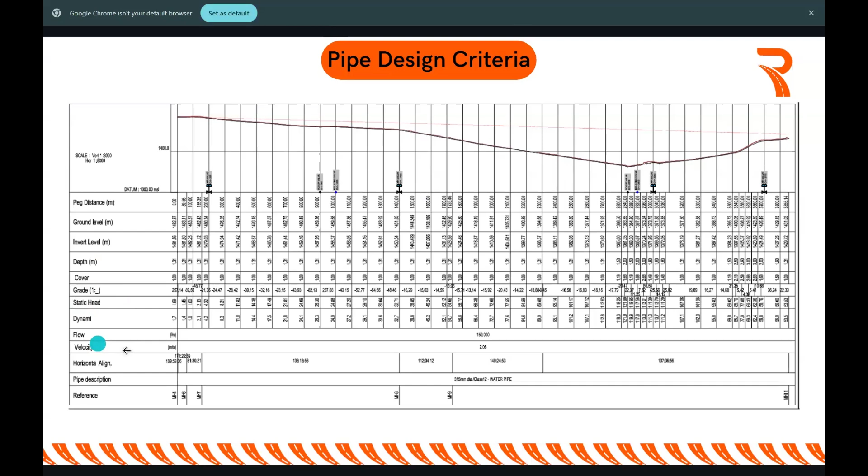I'm not going to talk about how to calculate all that, just the design criteria you need. We're going to cover functional design considerations. The first is pump-pipe compatibility, investigated by doing what we call a system curve. Unfortunately I won't cover that either, but know you have to check whether the diameter of your pipe correlates with the discharge released by your pump.

You just don't plug in any diameter of pipe. We said it's a minimum of 160 going up, but your 160 may not be compatible with a discharge of 60 cubic meters per hour, so please look that up using system curves — you should find something along those lines. I bring this up because sometimes people just say let's use a pipeline of 200, plug it in, and assume it works, without checking if it's compatible with the flows released by the pump.

Then we also have what we call the self-cleansing velocity. Even though this is a pressurized system, you need a minimum velocity in your pipeline or rising main. The minimum velocity should be 0.75 to 1 meter per second, to prevent solids from settling — any sedimentation of solids is not wanted. The maximum velocity should be at most 3 meters per second; anything above that will cause wear and tear on the pipes.

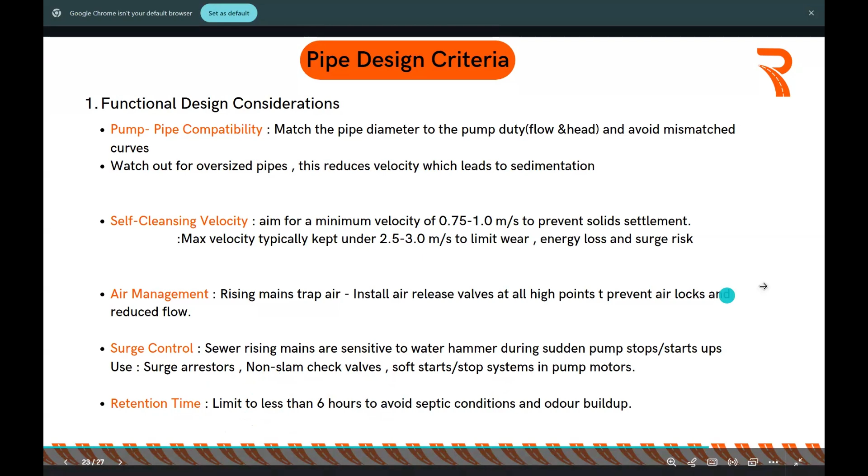Then we're going to talk about physical designs. This should be very, very easy. We're talking about your pipe material. We have got a wide range of pipes that you can use. You can use HDPE or UPVC, but only heavy duty, or you can use ductile iron, but it has to have what we call an epoxy lining. However, HDPE is preferred for flexibility, durability, and surge absorption.

Now, pipe diameter, recommended minimum is 160 millimeters. So large diameters reduce friction, but can increase settling of solids, so you also need a balance. The bigger you get, you know that your velocity from the continuity equation, Q equals VA. The more I increase my V, it affects my A. So the velocity is inversely proportional to your area. But if you increase your pipe diameter, then you also increase the pressure, reducing your frictional losses, but at the same time, that might increase your settling problem.

So remember, don't oversize things. You size the correct size of what you need to use, particularly if you're using anything that has to do with water and wastewater management. You need to size your infrastructure. Never oversize, you will have problems.

Minimum cover is 600 millimeters in non-trafficked areas. Minimum cover should be minimum there, should be 900 millimeters in road reserve or vehicular zones.

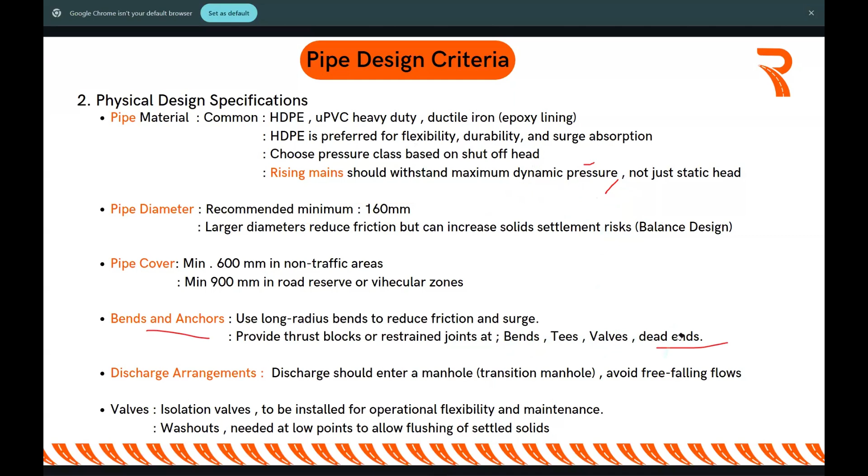Then the issue of isolating valves - I'll just quickly show you guys in the next slide. This is the configuration that you might need, particularly for your pump station. Just as you can see, this is your self-priming pump.

As you're coming out of there, you always need what you call a non-return valve, because whenever you're having a pump, you have to ensure that there is no backflow. So we have a non-return valve, that's the first thing. After the non-return valve, we have a gate valve, and after the gate valve, we then have an air valve. So those are the three most important valves that you need.

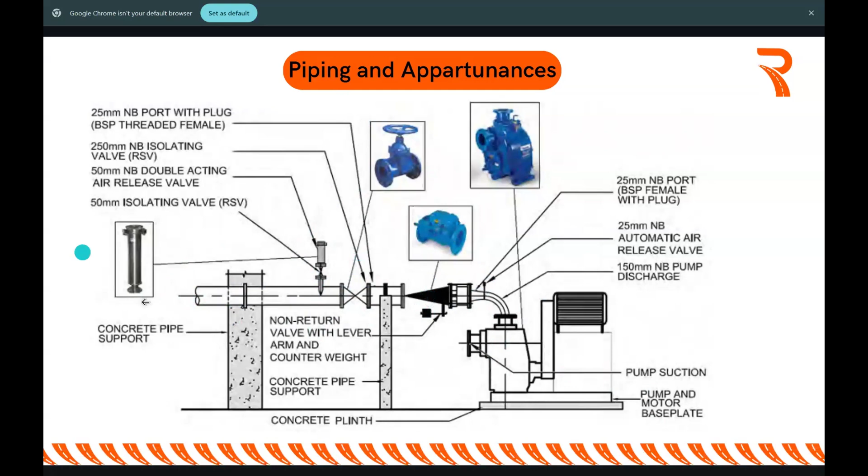I usually like to place my air valve outside the pump station, because sometimes when the air valve is operational, there's some water that comes out of it. And if you put it inside your pump station where there's electrical equipment, you might cause some electrocution. So standard practice is to place your air valve outside your pump station. But inside the pump station, just immediately after your pump, place your non-return valve and then your gate valve, and then you can place your air valve just outside.

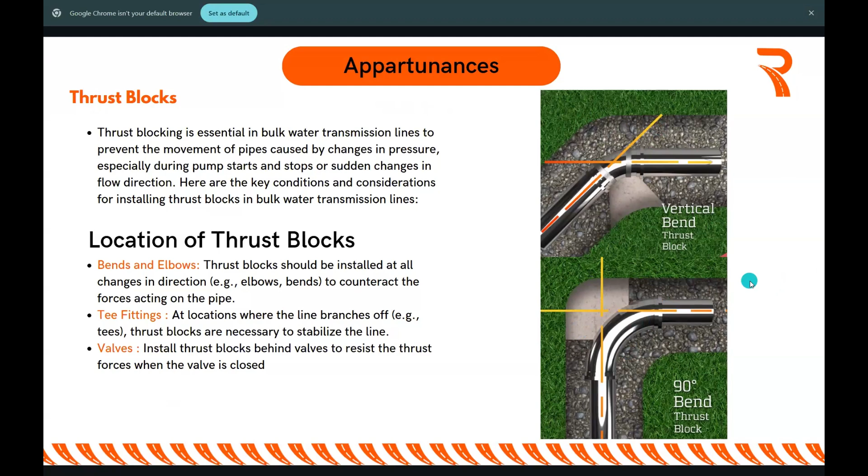Then we already spoke about thrust blocks. Every time we're having bends, always put your thrust block, right? I think that's more about it. I'm sorry I had to rush quickly at the end there.